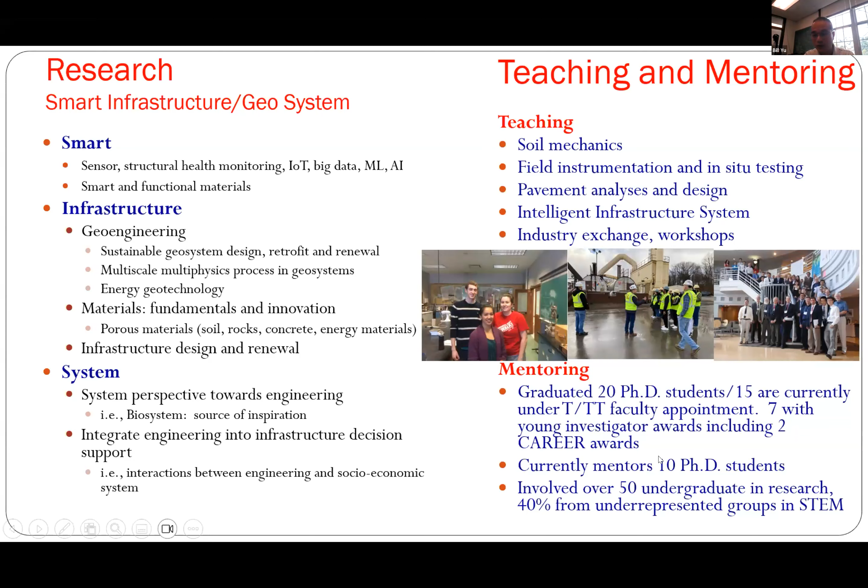Okay, sorry. So the motto I'd like to share: there was a pretty famous poem from over 1,000 years ago, saying if we want to appreciate the beauty of a mountain, we cannot stay inside it. You have to stay away from the mountain to really appreciate the grand view and the beauty of the mountain, which is very aligned with the motto at Case Western Reserve University, to think outside the box. So that's the essential notion I try to integrate into my group.

Mostly my group consists of PhD students, and sometimes we also host undergraduate students and high school students in research activities. This is a recent photo when I took my group for a retreat. After everybody shared their research, we enjoyed some happy time together. A few group members were missing, but this one captured the excitement pretty well. Every group member is passionate to explore innovation.

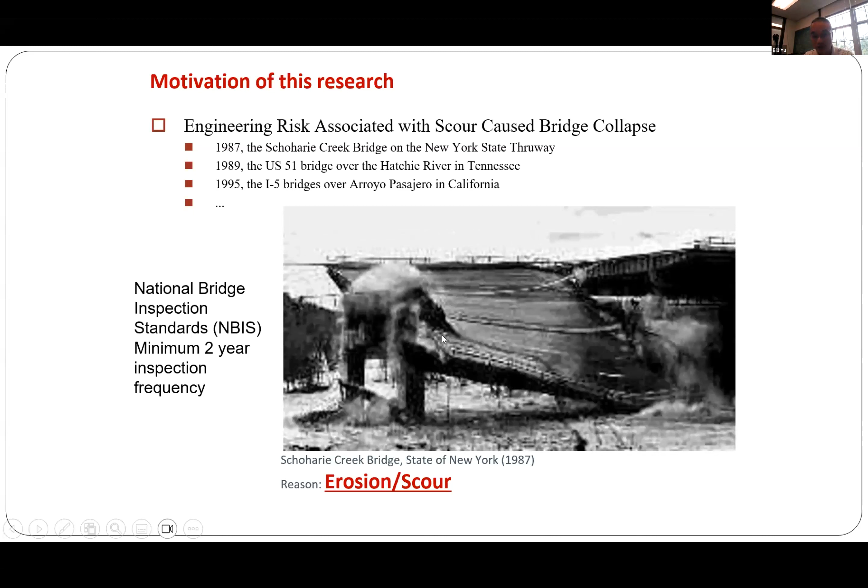So, bridge scour refers to the phenomenon when, during a flood event, the flood takes the sediment away from around the bridge foundation. Consequently, the bridge foundation, the bridge pier, loses the lateral support of the soil. Then in the extreme case, of course, bridges collapse. This has happened all over the world. In U.S. history, incidents of bridge scour are frequently documented.

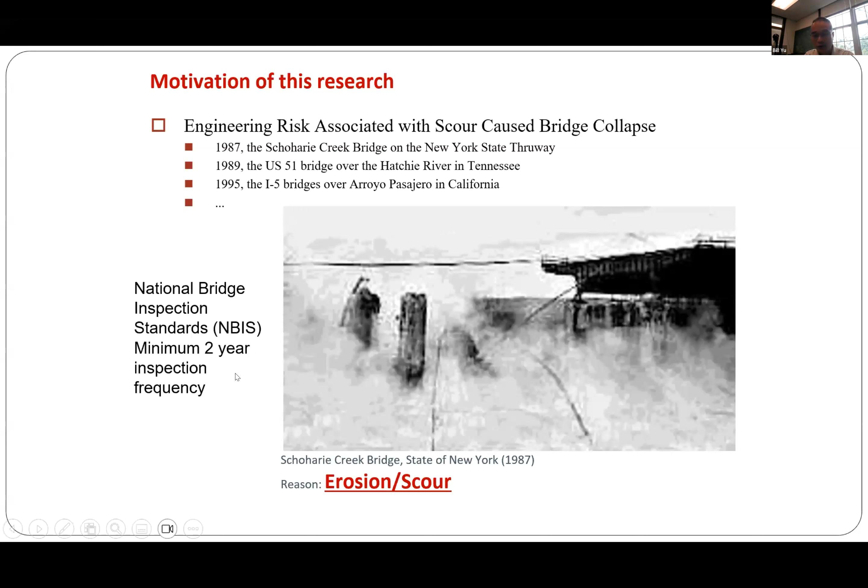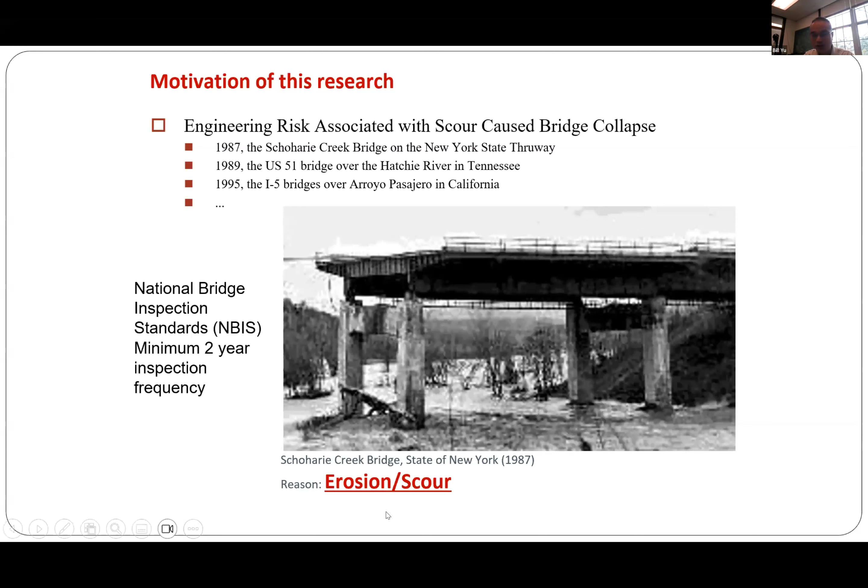Because of this kind of issue, the National Bridge Inspection Standards require bridges to be inspected every 2 years. And the fundamental issue is erosion, which involves a geotechnical process. If you look at the causes of bridge failure, the hydraulic reason, bridge scour, is responsible for almost 60% of failures. There are other factors like overload, collision by ships or boats, and earthquakes, but all these together are still a smaller contributing factor compared with bridge scour.

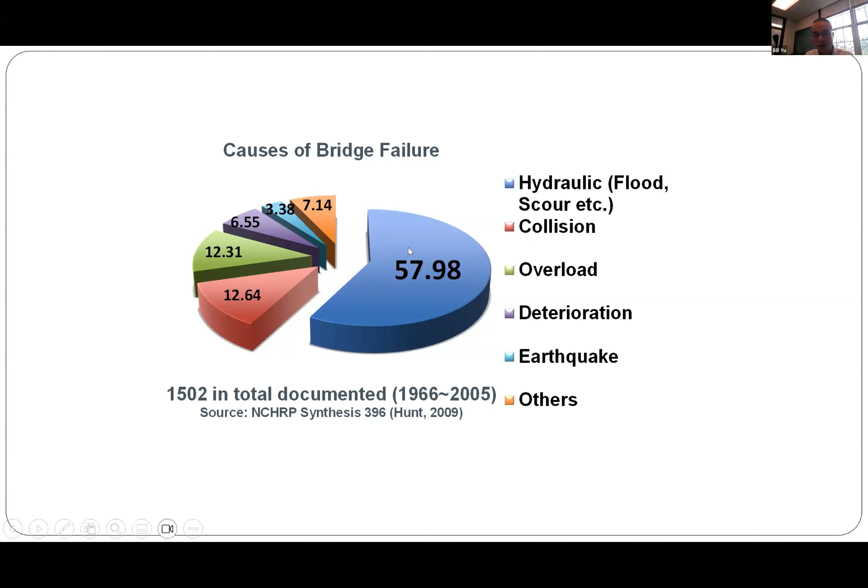So that just illustrates the importance of this issue. And also this phenomenon is very complex, because bridge scour, oh, I don't know why it's jumping. So bridge scour involves a complex interaction between fluid, soil, and structure. So it involves geotechnical engineering, hydraulic engineering, structural engineering. So essentially, it's a complex issue.

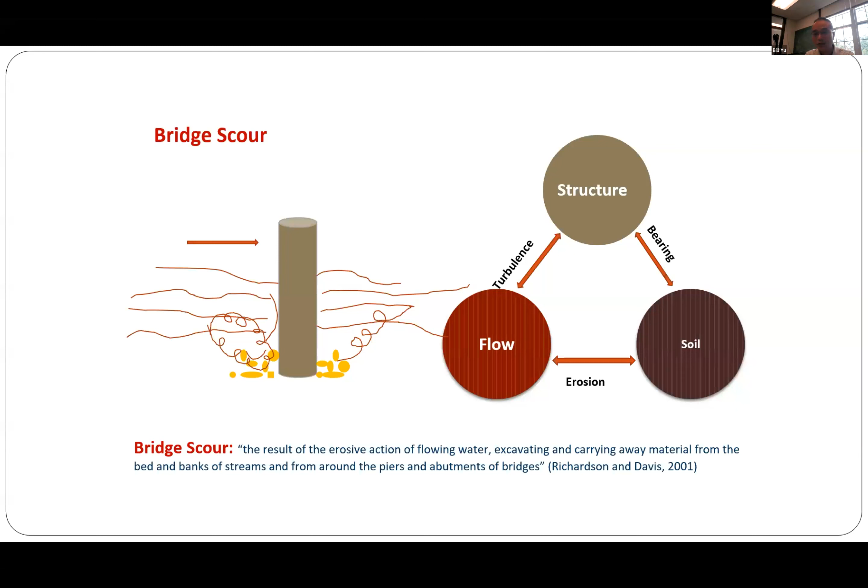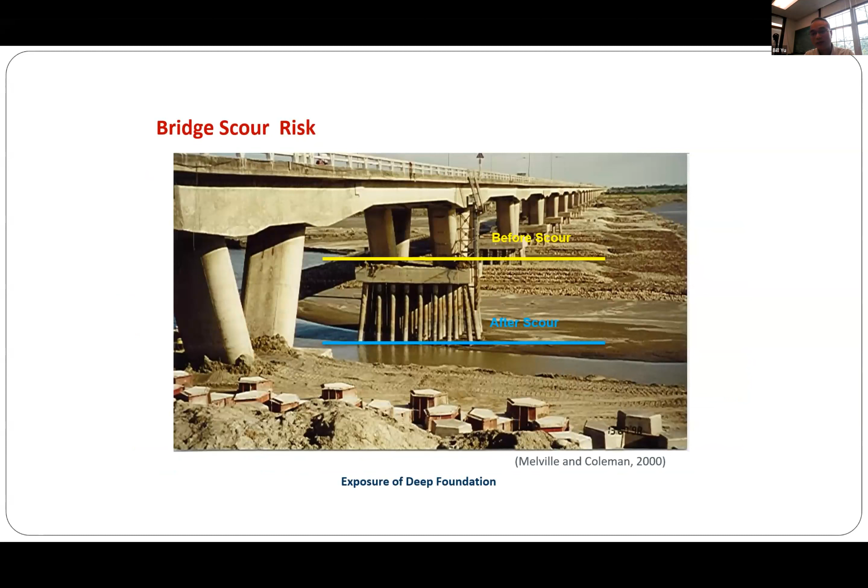And also the consequence is, it takes the sediments around the bridge foundation away and exposes the bridge foundation, makes the bridge foundation unstable, which then impairs the safety of the bridge. And from the practice side, in bridge scour design, essentially we need to estimate how deep the scour happens when a bridge is built, so that the bridge foundation is designed sufficiently deep in order to take away the impact of bridge scour.

And also, these kinds of design equations are mostly from laboratory scale experiments. So they don't necessarily describe what's really happening in field conditions. And also, another important factor in bridge scour design is to estimate how strongly the soil resists erosive force. This area, what's called a soil erosion model, has been studied for a long time in hydraulic engineering, in the water resource and environmental engineering area.

So this kind of model is typically extended in practice to describe the hydraulic erosion happening with bridge scour. And experience indicates the extension of existing models developed for other purposes, like environmental or water resource purposes, does not adequately consider the unique complex soil-structure-flow interaction during bridge scour. So the direct extension model has a limitation.

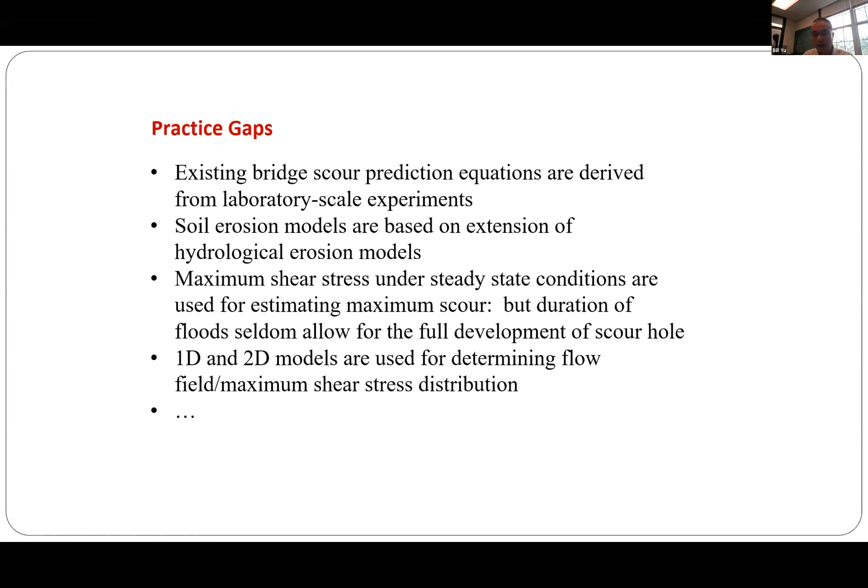So essentially, all these, from an engineering approximation perspective, provide some guideline in scour design and risk mitigation, but do not completely address the most fundamental issues, and also do not come up with the most safe and resilient design. So that's the practice gap.

During the flood event, we go to deeper scour depths, a larger amount of soil gets eroded, but during the flood retreat, sediment refills back, settles down, refills the scour hole, and then another flood comes in and erodes it again. So it's a repeating process. The current engineering practice of inspection every 2 years mostly happens after the flood event is over.

So for example, if this is a flood, the most unsafe condition, which is the deepest scour, happens during the flood. But the inspector may come back to inspect the bridge after the flood event, which may correspond to a smaller amount of erosion. So that estimation might not address the safety issue during the extreme event. So that's a limitation of the current practice.

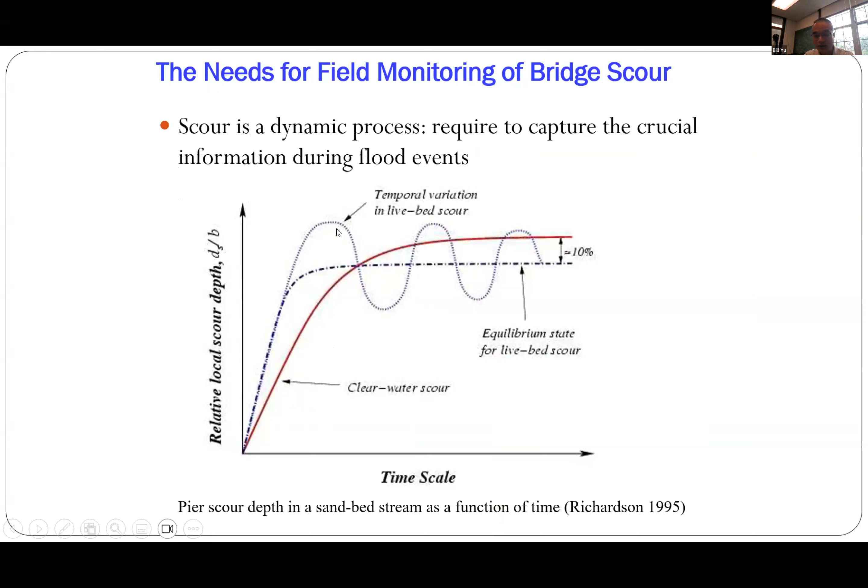So essentially, ideally we should be able to capture the erosion and also the backfilling process. But it turns out that is pretty challenging. So there are different practices to evaluate and monitor bridge scour. For example, a very common way is visual inspection. That mostly happens when the stream is relatively stable, sending a diver under the water with a camera to capture the shape of the scour hole and evaluate whether the bridge structure is safe.

There are also instruments like this one. Mounted instruments, which install a camera or something, drop it down into the river and do a survey. And this one is actually a photo shot by a research group from Japan. There's also manual measurement: the engineer uses a yardstick to dig down at the bridge abutment and find out how deep the surface of the sediment is, as a way to determine the scour.

There are also some monitoring devices developed in the history of research in this area. For example, a very common one is using ultrasonics: mount an ultrasonic sensor. The ultrasonic wave travels down the bridge through the river water and reflects back, and then from the echo, the time lapse to hear the echo sound, we find out how deep the erosion happens.

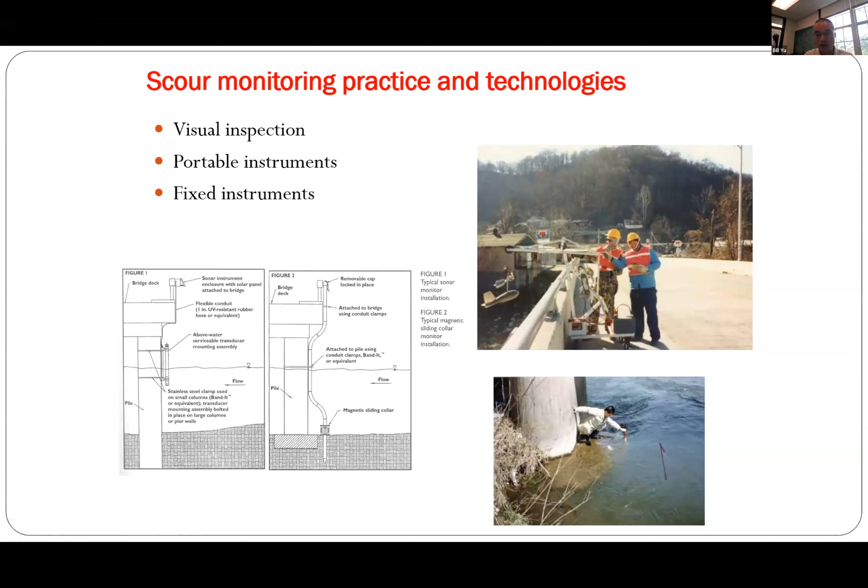So that makes it very hard to evaluate the most critical condition, when the safety of the bridge is possibly compromised. And also, for example, using a metal detector only works after the flood event, when the condition is stable, so it does not capture the most unsafe condition.

Yeah, so essentially, this study was sponsored by the Federal Highway Administration, because many bridges are subject to bridge scour and associated risk, and it's very expensive to rebuild a bridge. So the recommendation was that installing instrumentation to monitor bridge scour would be a very important safety countermeasure. Under financial limitations, this provides a way to assess the failure risk of a bridge in a flood event, provide safety warnings or decision support, and become a cost-effective scour countermeasure.

And also from existing studies, for example, some regulations by U.S. transportation agencies, like Georgia, require that if the safety condition is uncertain, the bridge needs to be shut down. One case documented in a Federal Highway publication was in 1994, a major flood in the state of Georgia, when there was no instrumentation monitoring bridge condition associated with scour.

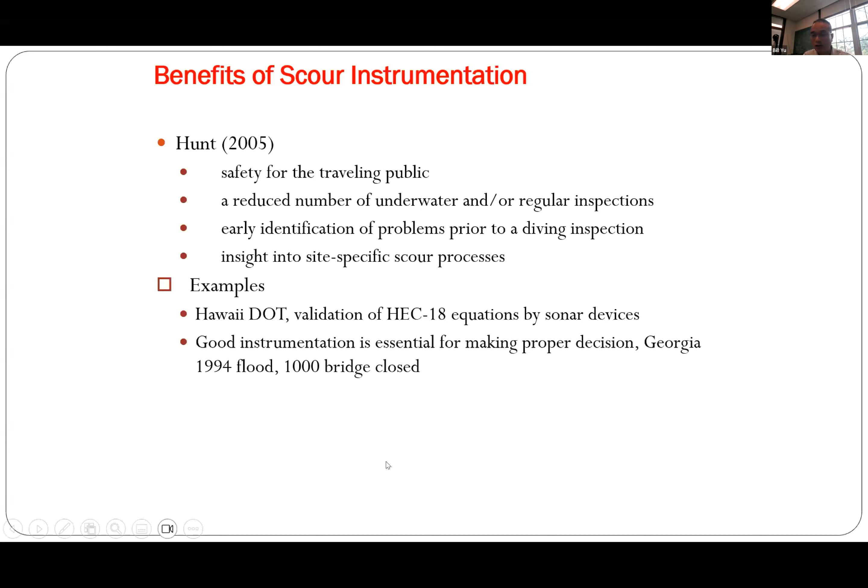So instead, because of the uncertainty and safety risk, the state DOT of Georgia decided to close 1,000 bridges for inspection before reopening them to traffic. That caused a lot of disturbance to the transportation network. So that's just to say installing bridge instrumentation to monitor scour has some benefit.

And then for the deployment of scour instrumentation, what's required, for example, the mandatory criteria: they need to be installed close to the bridge, because as one of the previous slides shows, scour holes mostly happen close to the bridge. So they must be able to be installed close to the bridge pier or bridge abutment. In terms of accuracy, we don't have to be scientifically accurate; there's a tolerance of up to 1 foot, which will not compromise much the safety assessment decision.

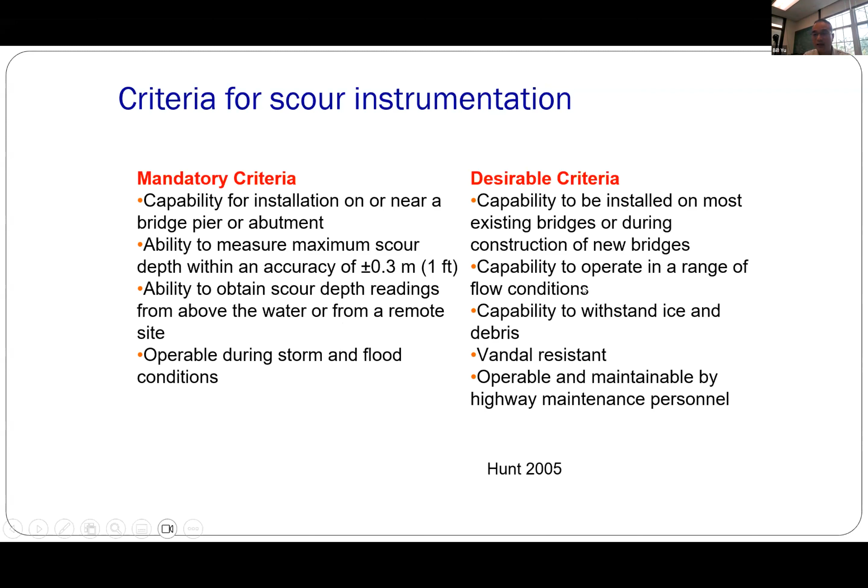Also, ideally, the sensor needs to be able to monitor the scour depth remotely, so we don't have to send people down to the bridge foundation to do the data acquisition, and also be able to survive very large storm and flood conditions. There are also desirable criteria for instrumentation, maybe not mandatory, just desirable metrics. So there are some field monitoring tools developed in the past by the Army Corps of Engineers, because they typically work with many challenging bridge river conditions.

So for example, these are the summary of instruments deployed in the field to monitor the scour hole. Again, this scour hole, as described, mostly happens adjacent to the bridge foundation. So the key is to find out how deep the scour hole evolves. There are different technologies; this one is what's called an instrumented fish.

Essentially, it's shaped like a bubble, and they are pre-buried under the sediment of the river channel at different preset depths, for example, one every 1 foot. This instrumented fish has a motion sensor and a radio transmitter. So, for example, if erosion happens, this instrumented fish will float.

When they are exposed, they float to the surface of the river, and at that moment trigger the radio transmitter to send a signal to a radio receiver that's sited on the bridge deck. So that then indicates how deep the scour hole evolves. So this provides monitoring to determine the maximum scour depth during the flood event. And this instrument is a one-time use, so you can only deal with one flood, and when another flood comes, you need to reinstall the instrument.

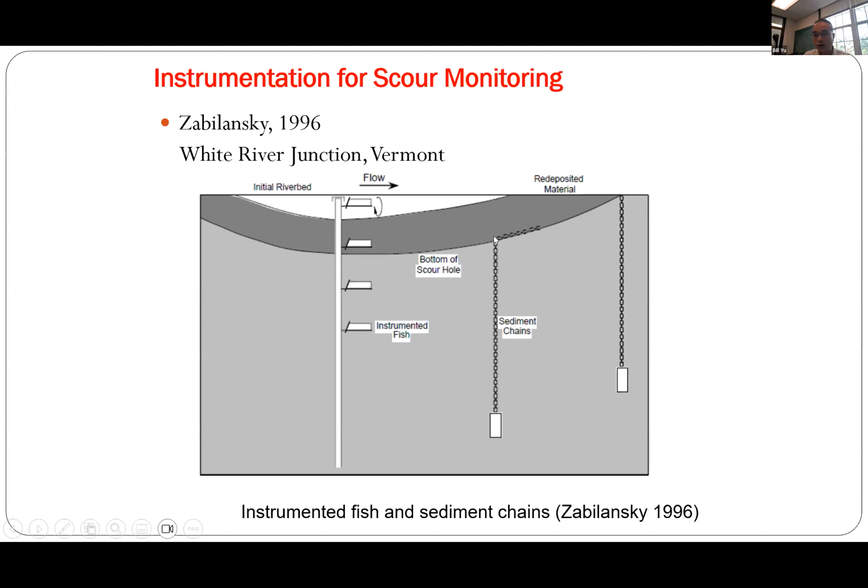And then there's another one. This is using sediment chains. So they drill a hole into the sediment and put a chain in the vertical direction at different locations along the bridge scour hole. Initially this chain will be vertical. If the sediment gets eroded, the chain will fall down. So by post-flood retrieval of the sediment chain, you can find out how deep the scour hole evolved during the flood.

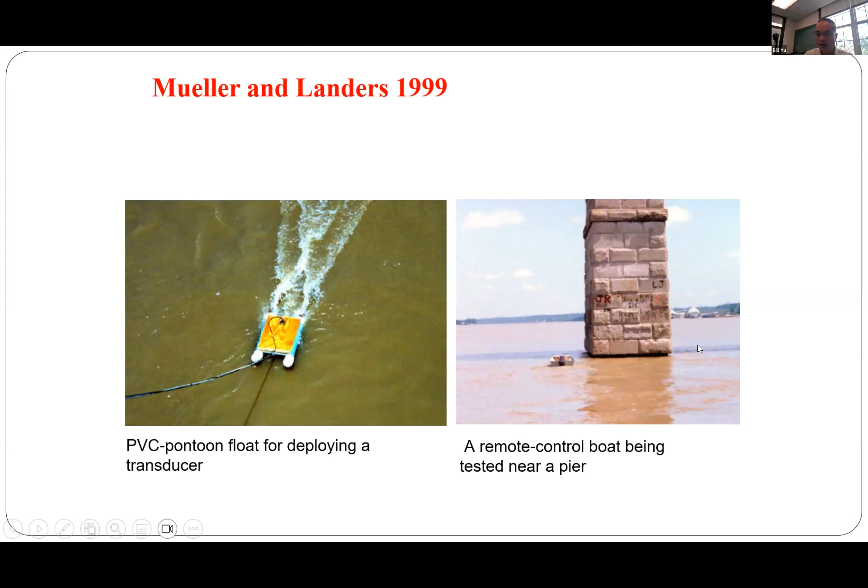So there are a lot of different studies looking into developing instruments for scour hole assessment. As mentioned, there's also acoustic-based methods and metal detector-based methods. There's also a remotely operated boat with an acoustic sensor. They can remotely control it and circle around the bridge pier to find the scour hole. These kinds of instruments typically work pretty well in steady water conditions, but during the flood, a lot of debris comes with the flood, making operation of the remote control boat challenging under that condition.

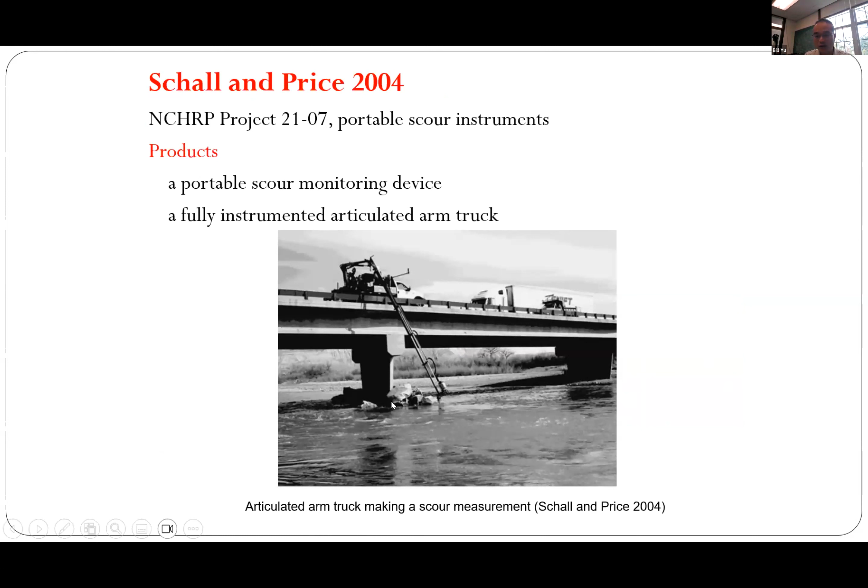So there are also tools using a tractor articulated arm truck that allows probing the scour hole depth while the inspector is located on the surface of the bridge, without having to access the bridge foundation and expose the personnel to the risk. So essentially, these are the state of practice. The sonar sensor is the most popular, then magnetic, using the metal detector with a sliding collar, second, and then the instrumented floating device third.

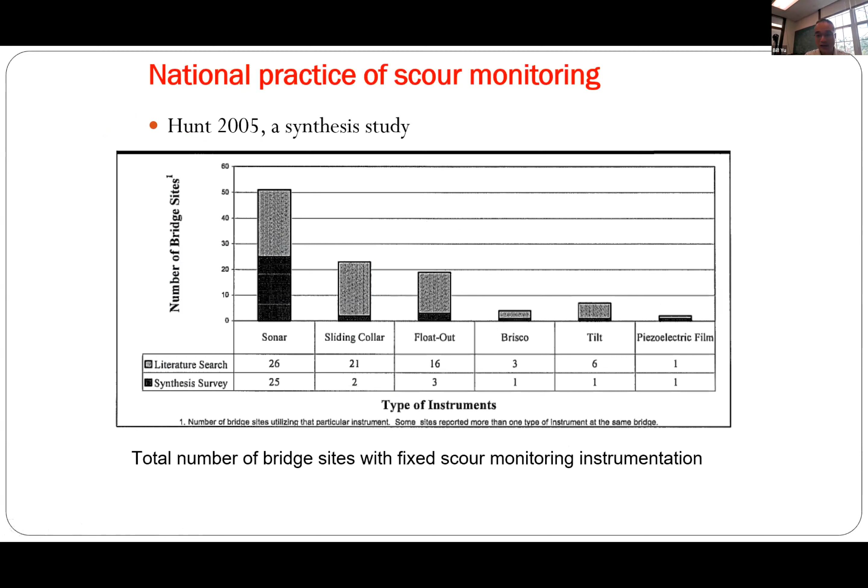So these are just the state of practice. Sorry, this automatic advance, so strange.

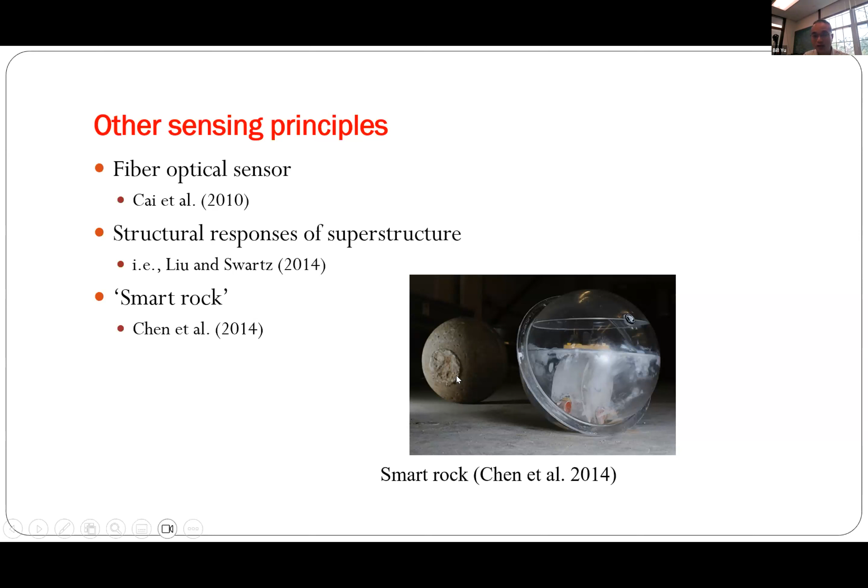So in recent years there's been some newer progress in the domain, using fiber optic sensors mostly to monitor structural stress development, because scour leads to changes in the structural response. There's also another technology called smart rock. It's a sensor with a magnet inside, encased in shielding that looks like a rock, with a round, spherical shape. During the flood, this rock always falls to the bottom of the scour hole, and then we can use a magnetometer to locate the smart rock and find out the scour hole depth. So that's the new development.

The Army Corps of Engineers and also Northwestern University developed a time domain reflectometry based scour monitoring device. This one uses a thin vertical cable with blades along the cable. When the scour happens, it exposes the cable and the blade. The blade will rotate, causing a shearing force on the cable. This involves guided radar waves sent down from the bridge superstructure. When the cable is sheared, there's a reflection. So this allows detection using electrical waves to find where the blades are exposed, or where the erosion depth evolves.

There's another one using similar time domain reflectometry, guided wave electromagnetic radar. This involves sending a signal, like the echolocation principle, in the bed. The signal travels along the waveguide, and when the waveguide sees a difference in the surrounding material, like water versus sediment, it generates a reflection. This also allows us to tell how deep the scour hole goes.

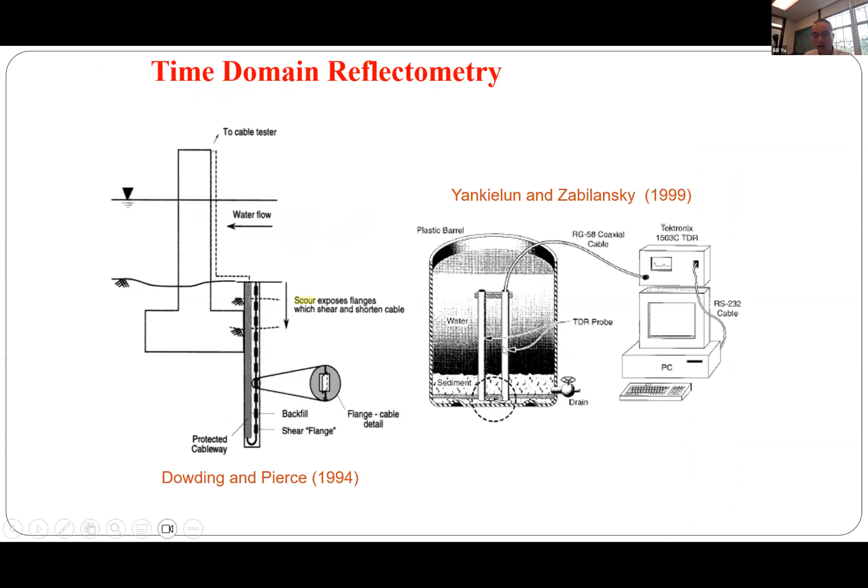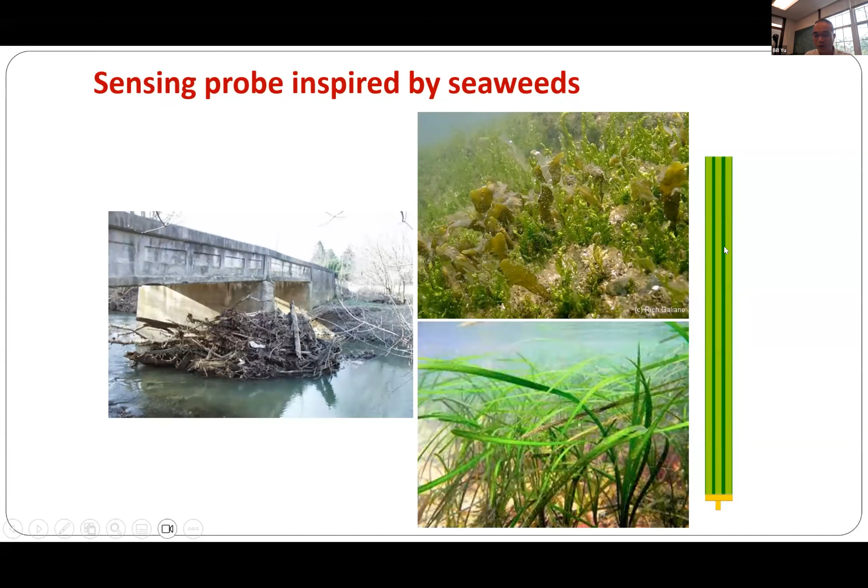So essentially, inspired by that, we developed this kind of seagrass-inspired sensing probe using guided radar. The principle for this monitoring device is to send an electric signal which travels along the flexible waveguide. When it arrives at the water-sediment interface, it will generate a reflection, and then at the end of the waveguide, it generates another reflection. So in principle, by analyzing the signal reflection, we can identify how deep the sediment-water interface is, or how the scour depth evolves.

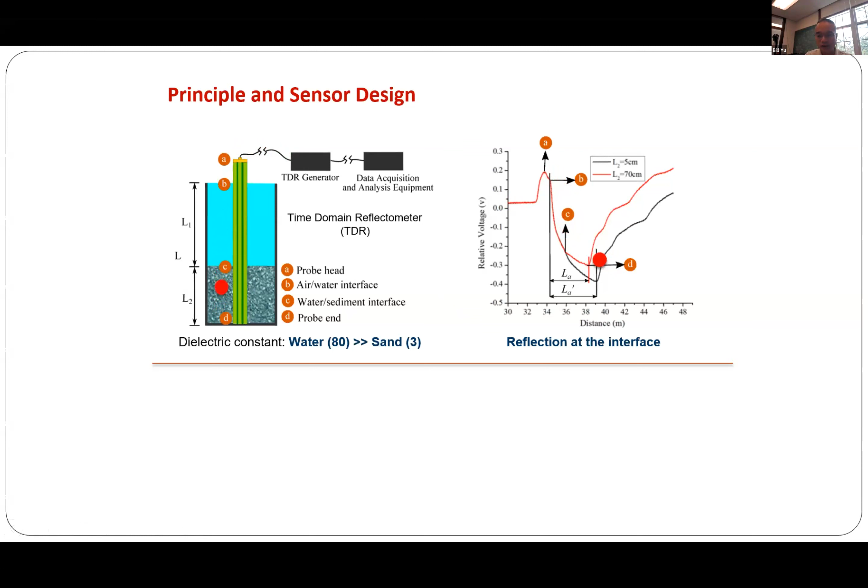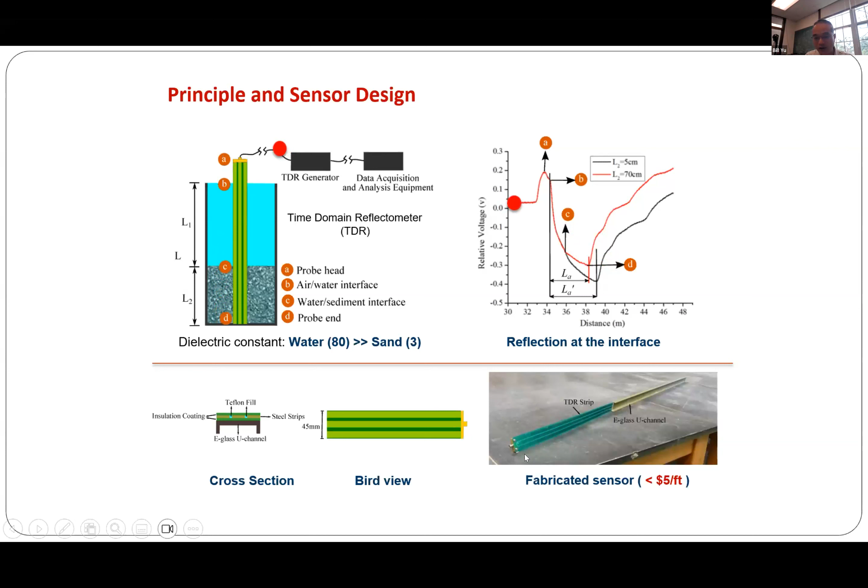So this is the actual prototype we fabricated. Using this concept, this is a flexible stripe made of inexpensive metal, three parallel metal strips with a coating, mounted on a supporting structure. So the cost is pretty inexpensive. And this illustrates the sensing capability. With this stripe as a waveguide, the bare stripe has a signal response like this solid line.

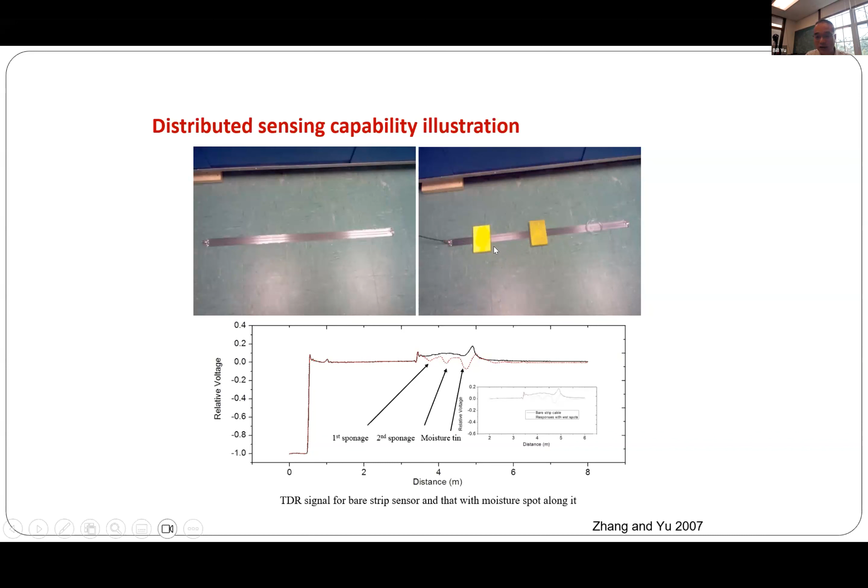And then we put artificial wet spots: a slightly drier sponge, a sponge with a lot of water, and also this moisture tin with water. When the wave travels along the waveguide, it generates a response because it sees a different material. So we can see the three dips in the signal response. This is an indication that the sensor is pretty sensitive to what happens surrounding the sensor probe, and to changes in material condition. For bridge scour, the change the sensor detects is the interface between the water and sediment, which is differentiable.

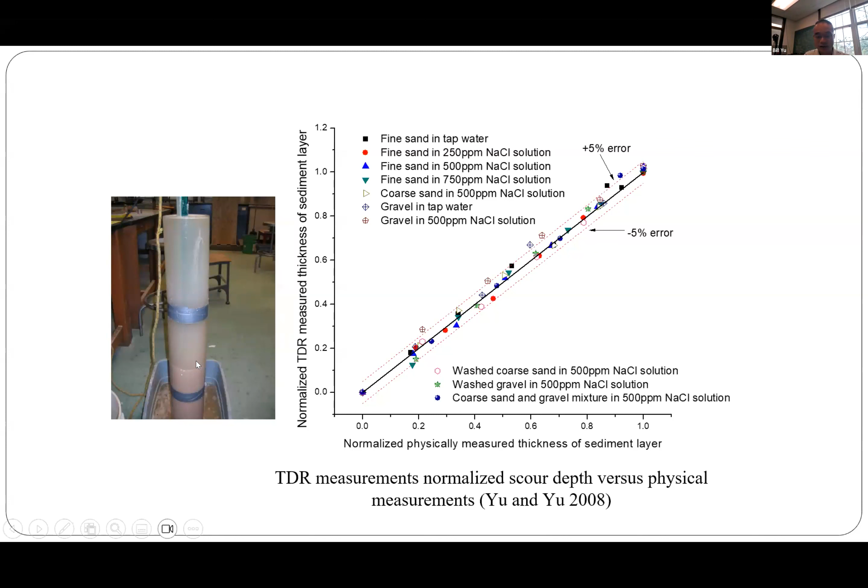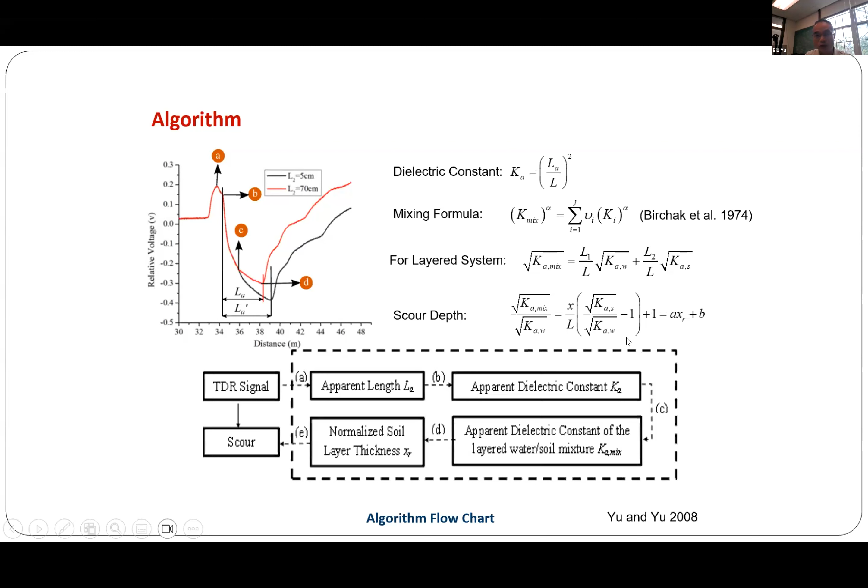Based on the laboratory study, we came up with a series of guides to analyze the signal from what's called guided radar, electromagnetic radar, time domain reflectometry (TDR). The signal response is kind of linearly related to scour depth. There's algorithm development behind this, but the end story is we came up with a simple way to interpret the signal to find scour depth with a relatively simple relationship. This is very important for field deployment, because we want the signal to be automatically analyzed rather than manually interpreted, since we can have a lot of signals from a field monitoring program.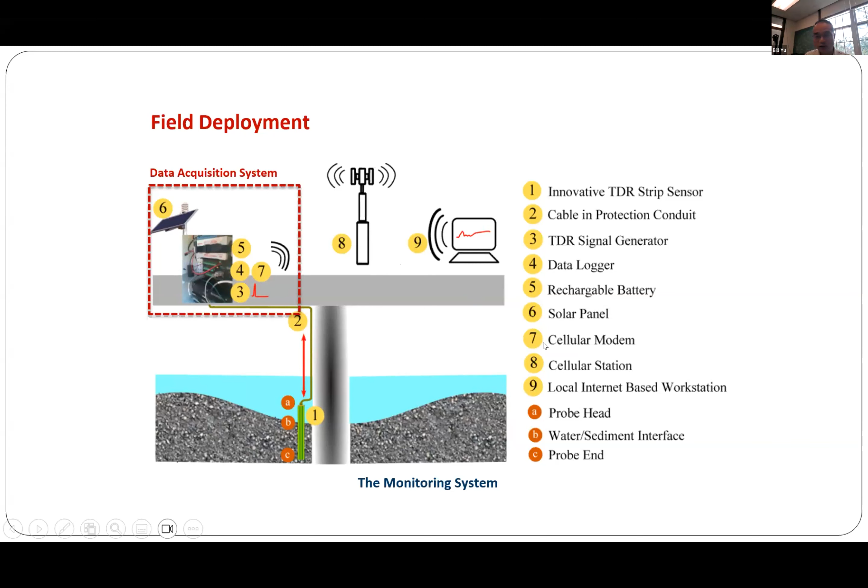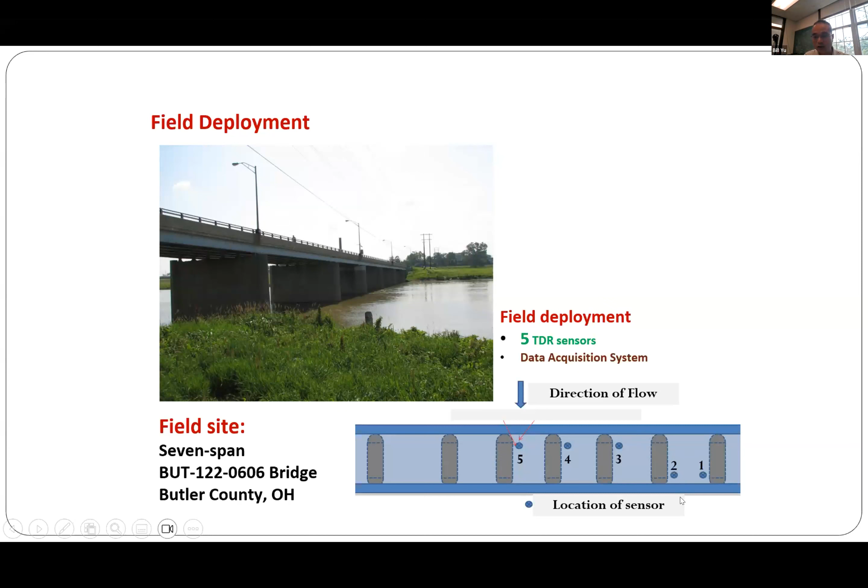We implemented that together with the Ohio Department of Transportation on one of their bridges. This bridge has seven bridge piers, and we installed five because it's a kind of symmetric condition. We tried to assess how well they would work in actual field conditions, with assistance from partners, including consulting companies.

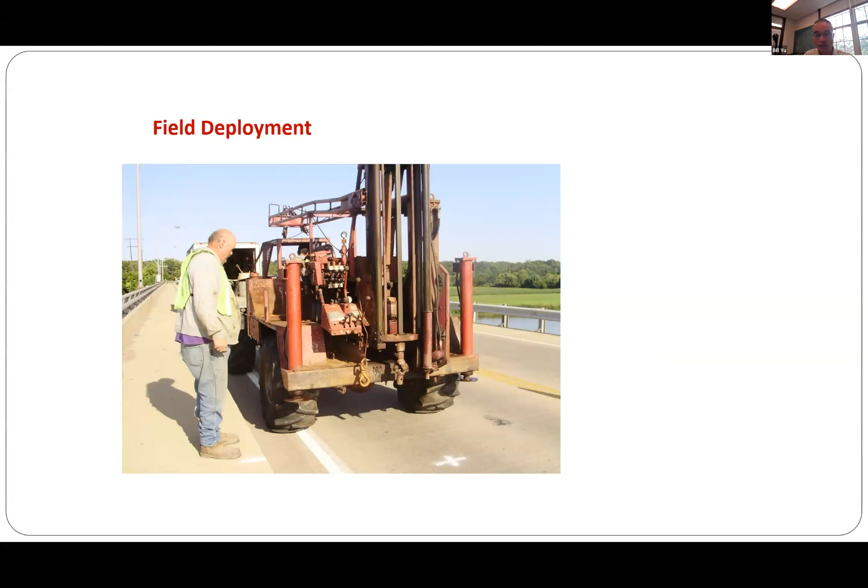What we did was bring the machine, because in geotechnical engineering surveys, if they retrofit or rebuild a bridge, they typically drill holes in the river channel to sample the soil and do geotechnical analysis to come up with a new foundation design. So we leveraged a similar procedure. Our sensor is designed to accommodate the hole drilled by this drilling machine at a regular geotech site investigation. So we drilled through the bridge deck and then put a tube down.

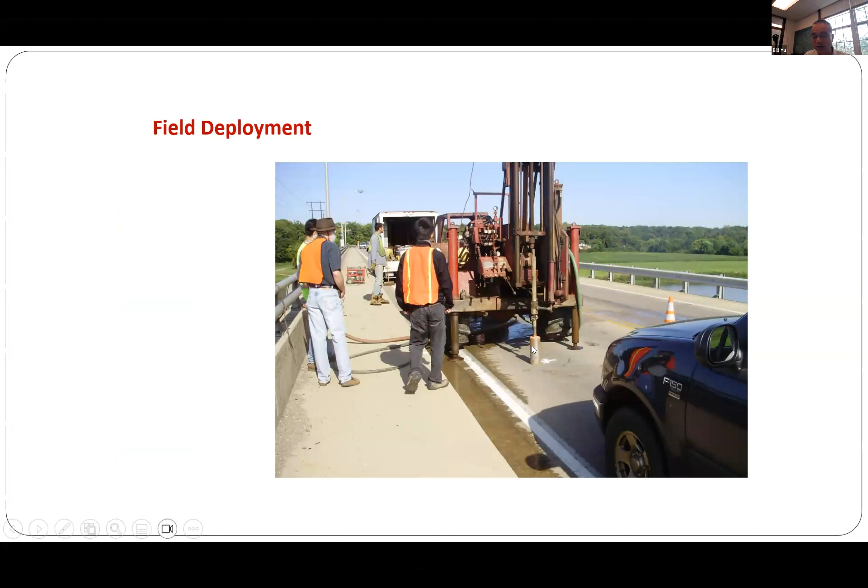That's the procedure commonly used for soil sampling in the site investigation for a bridge located across the river. Then we deploy the sensors through the tubes under the river channel. After that, we fix the bridge deck.

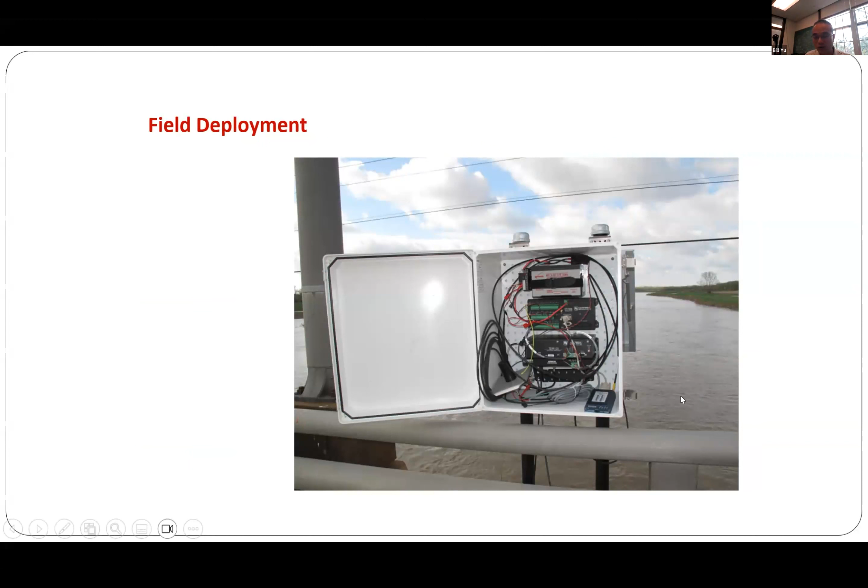Then we install the instrument on the side of the bridge. This is a monitoring box installed, which includes the battery and also a solar panel for long-term monitoring purposes, and also the controller, and a signal generator and a communication device.

To send the data to the cellular phone service, and relay that data to the office. Essentially, right after installation, we see a system change in the signal response, which indicates that after the small probes are installed in the ground, they disturb the condition of the riverbed, and there's a certain stage for the signal to become stabilized, and it caused a little bit of erosion.

Also, because the guided radar was able to get signal automatically, it allowed us to determine the scour process continuously. So essentially, we are able to capture scour development and backfilling process. We captured both processes, and also the bridge we studied has a river monitoring station.

So that has a river flow measurement. Essentially, what we found is the scour monitoring results correspond very well with the river flow condition. Every time there's a flood, like a peak increase in the stream flow, we see more erosion, and afterward there's a backfilling process. So that's the kind of validation.

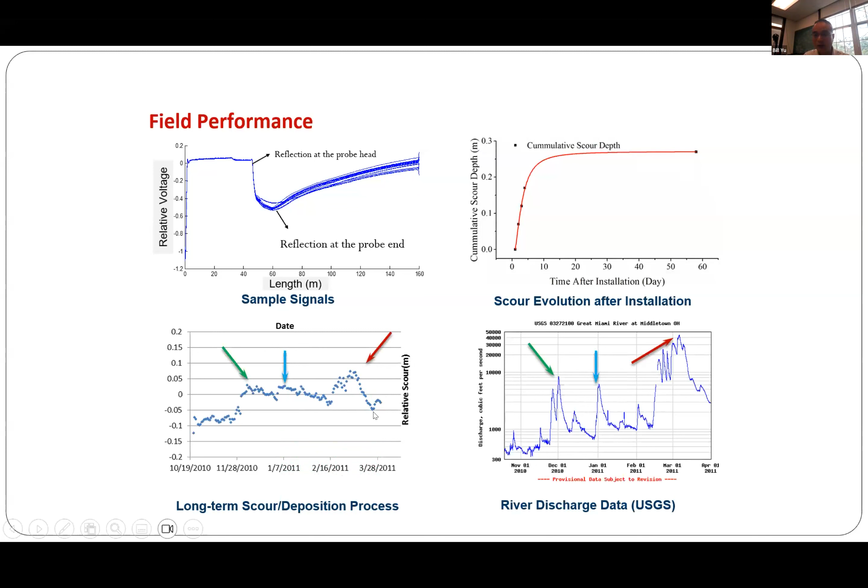The technology was able to capture both the erosion and the backfilling process, identifying the scour as a dynamic rippling effect.

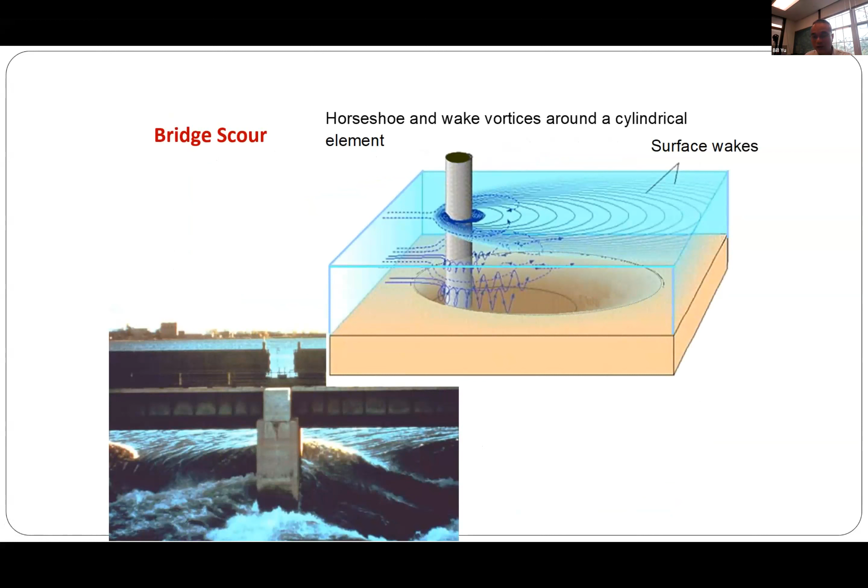It turns out there's no good way to characterize the energy of turbulence flow. In mechanical engineering, they use hot wire technology. You essentially put an electrically resistant wire in the boundary layer and blow wind, for example, to measure the turbulence flow, characterizing how quickly thermal energy is lost by the wire to be dragged away by the air. That's what indicates the turbulence energy.

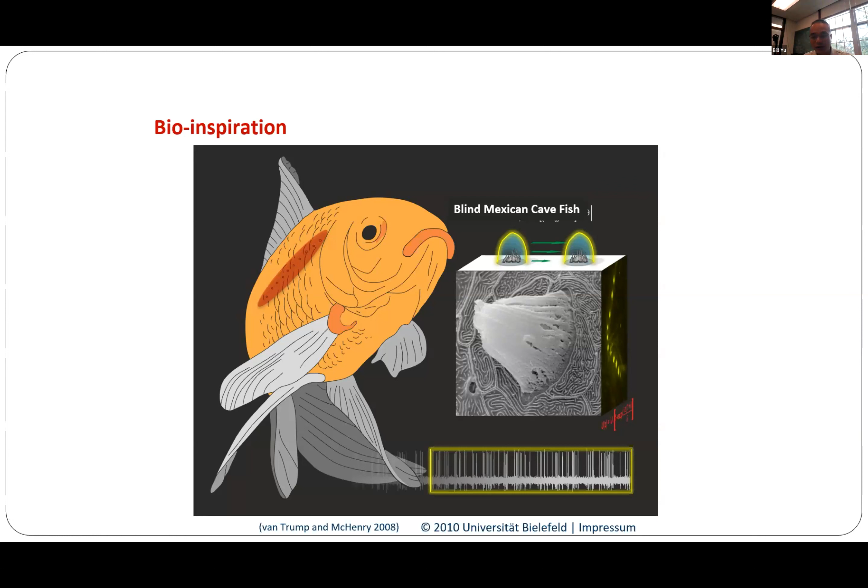So for this one, the story is about characterizing turbulence. There's no good way to characterize the turbulence using a sensor. For this part, we got inspired by reading literature from biology.

There's a very famous fish called the Mexican blind cave fish. As the name implies, this fish does not have any eyesight, so it's blind, but it still survives pretty well. So we were curious how it can identify conditions when swimming in the river.

It turns out they have a very unique design with a turbulence sensor on their lateral line. Essentially, what this sensor does is generate, when there's a disturbance to what's called the hair cell on the lateral line, an electric conductance, generating an electric neuron signal that allows the fish to detect flow.

So conceivably, if a flow comes in and disturbs the hair cell sensors along the lateral line, they generate a neuron signal, and there's a time delay in the neuron signal because the flow takes a different time to arrive at different hair cell elements. By determining the travel time difference of when the neural signal is produced, and with calibration from the neural network where they already know the distance, they can identify a turbulence flow coming towards the fish.

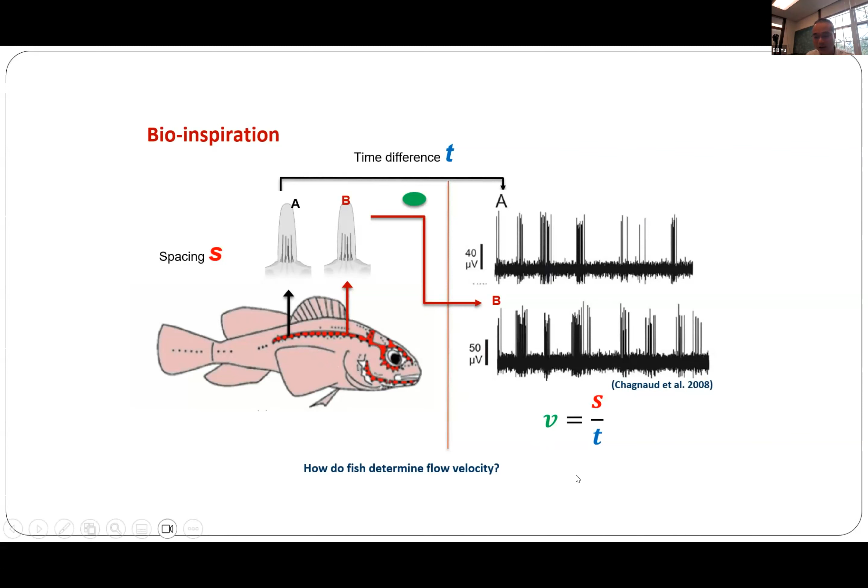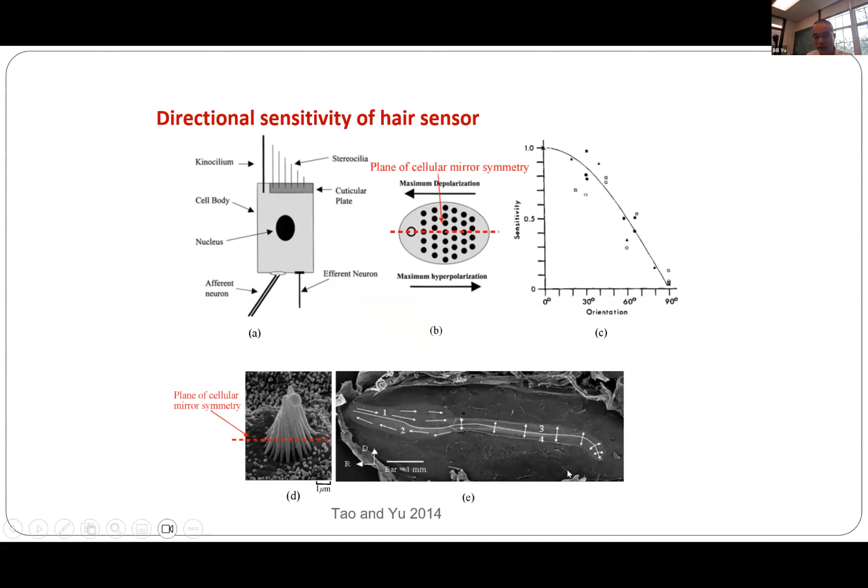So without even being able to see something, for example, if there's a predator coming for the fish, they will try to escape because they were able to detect how fast the turbulence flow is coming. Inspired by this, we actually looked to replicate this bio-inspiration to develop a sensor that's able to detect how fast turbulence flow is moving.

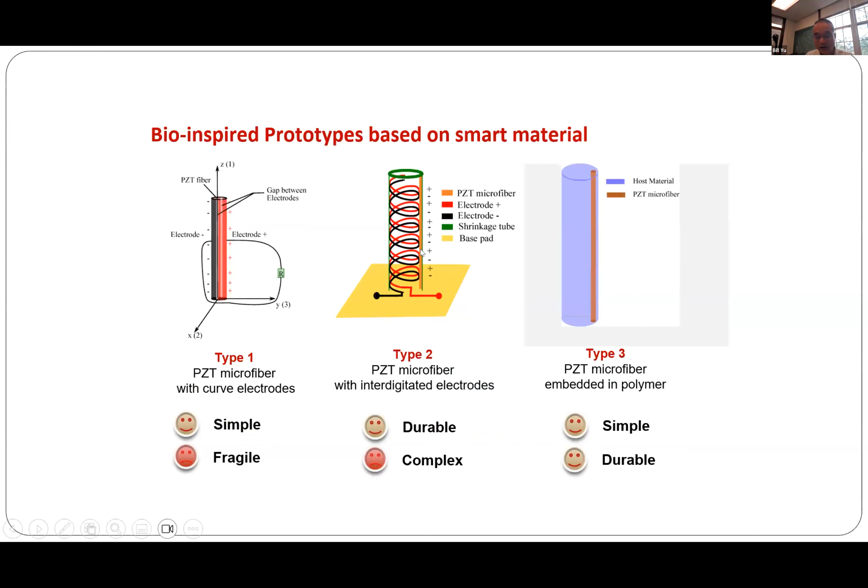So essentially, we came up with a design that emulates the bio hair cell sensor. This is a different generation we produced in the lab. The goal is for the actual sensor to be pretty small, in the micron range in length.

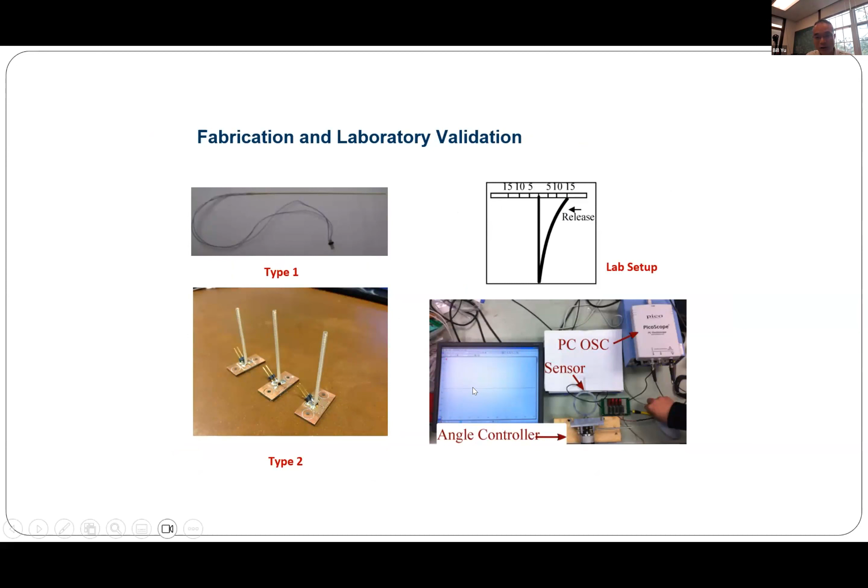We use a larger structure to capture the disturbance. So essentially, to evaluate this sensor, the sensor is under the disturbance of the structure, they generate a signal response that's allowed to detect the disturbance. So essentially, this is a concept.

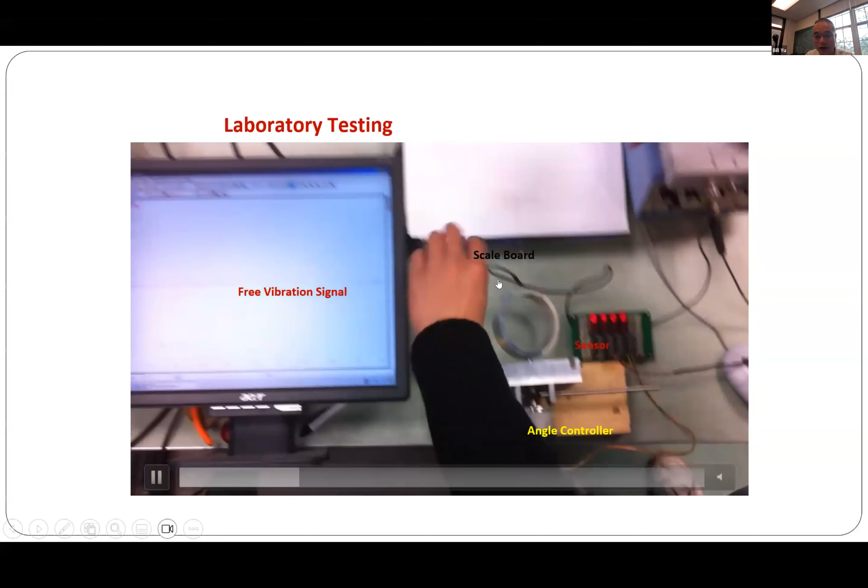It's from the setup we did. So we mounted the artificial hair cell sensor on an angle controller, and then we disturb it, like a bend, to deflect the hair cell sensor and see the signal response. We bend this one to a fixed distance and you can see the signal response from the sensor.

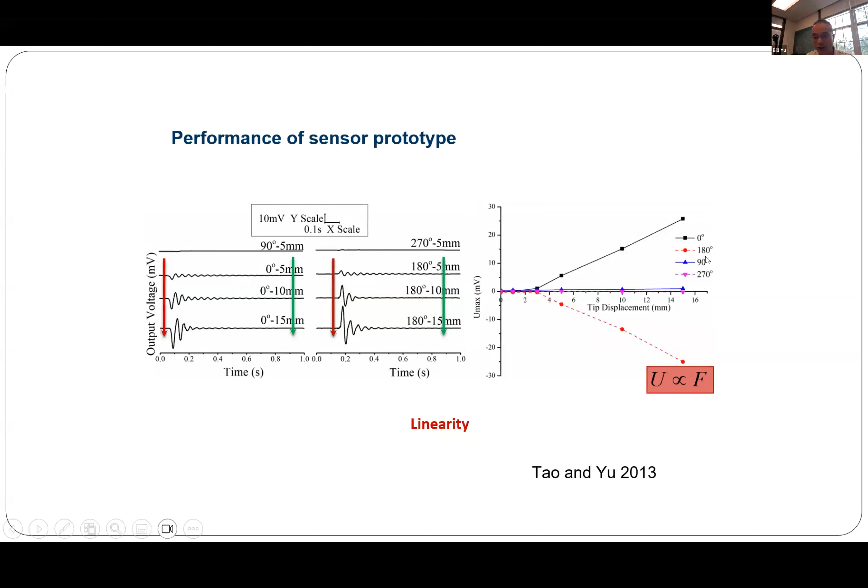Another very unique feature for the biology sensor is they have directional sensitivity, which means at a different direction they have a different magnitude response. So to summarize the result, we were able to find a design of sensor, an artificial hair cell sensor, that has a signal response very similar to what's observed in the biology system. They have different sensitivity in different directions, like 0 degree, 90 degree, 180, 270, they have different responses. This essentially allows us to reproduce the biology sensor and come up with a sensor that's able to directly characterize the magnitude of turbulence energy.

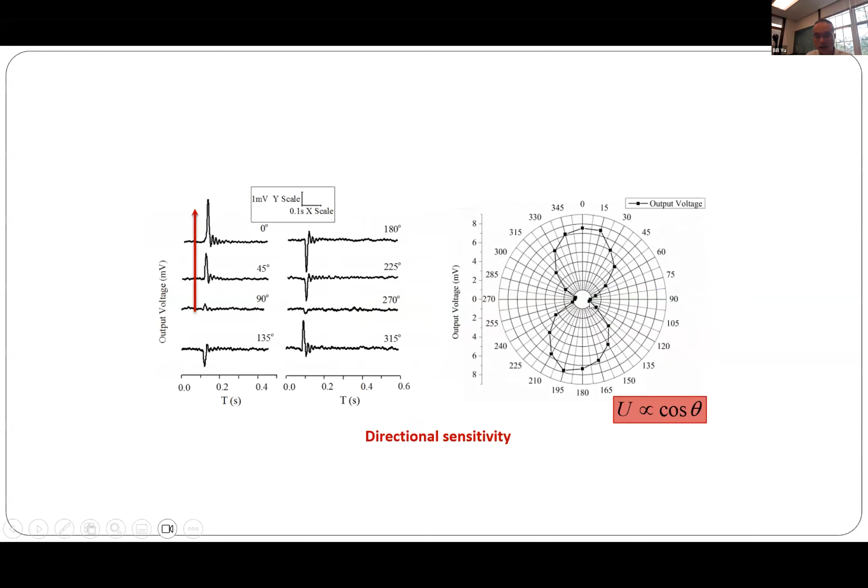So the scour process is also pretty complex. This is the workflow for that process, which requires determining the flow field, determining the shear stress, and also considering the turbulence condition to determine, in the end, the scour depth when the shear stress and the resistance are balanced out.

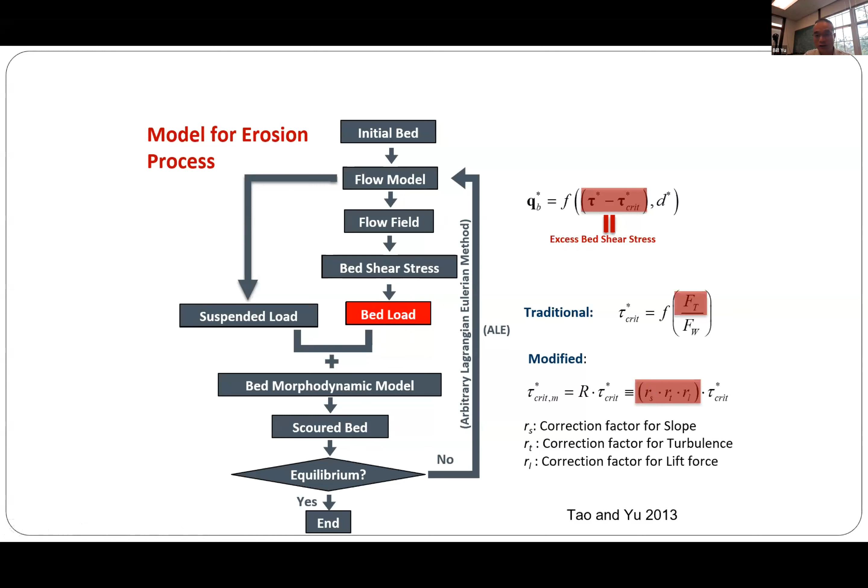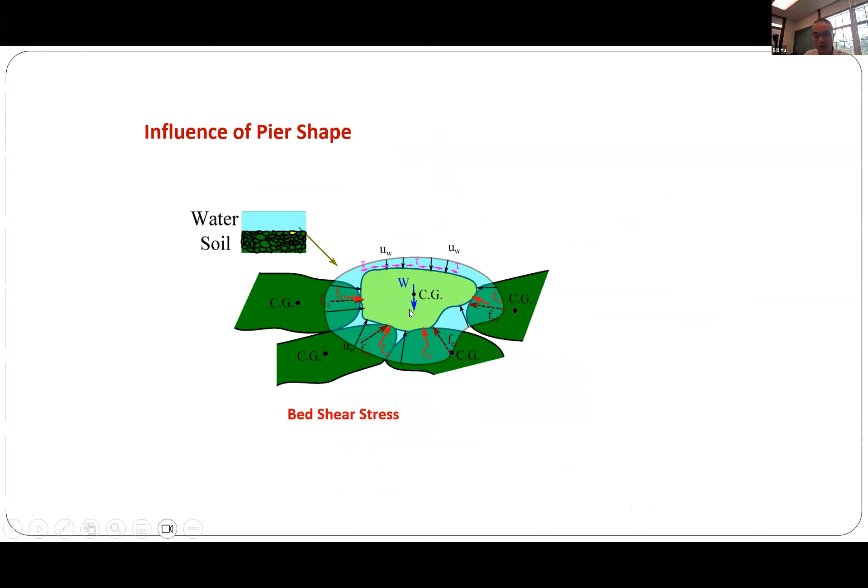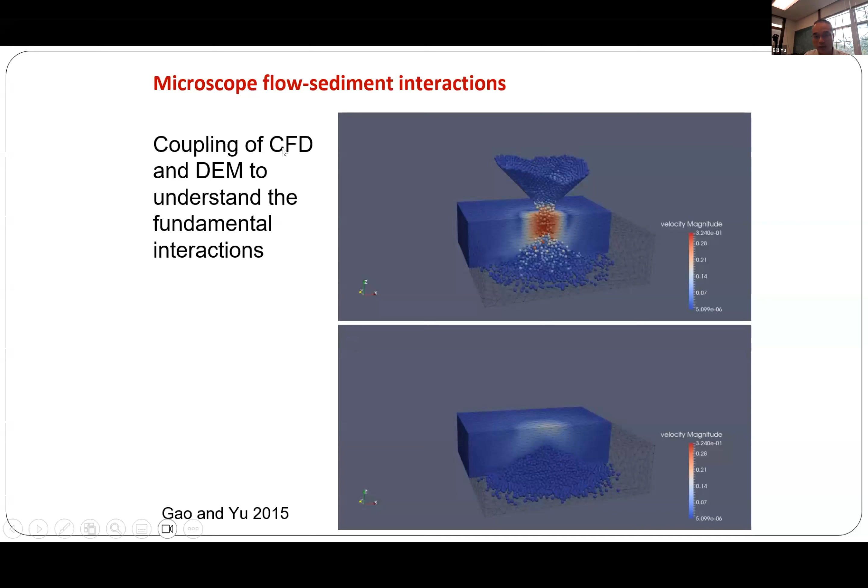So essentially, to implement this kind of multi-scale simulation, we need to understand and categorize what fundamental resistance the soil particle has to detachment by the erosion force of the stream, which turns out to be pretty challenging. For that part, we leverage a discrete element model combined with computational fluid dynamics. This is an example: CFD-DEM, computational fluid dynamics and discrete element model, come together to simulate the flow condition and also simulate how the particles interact with the flow.

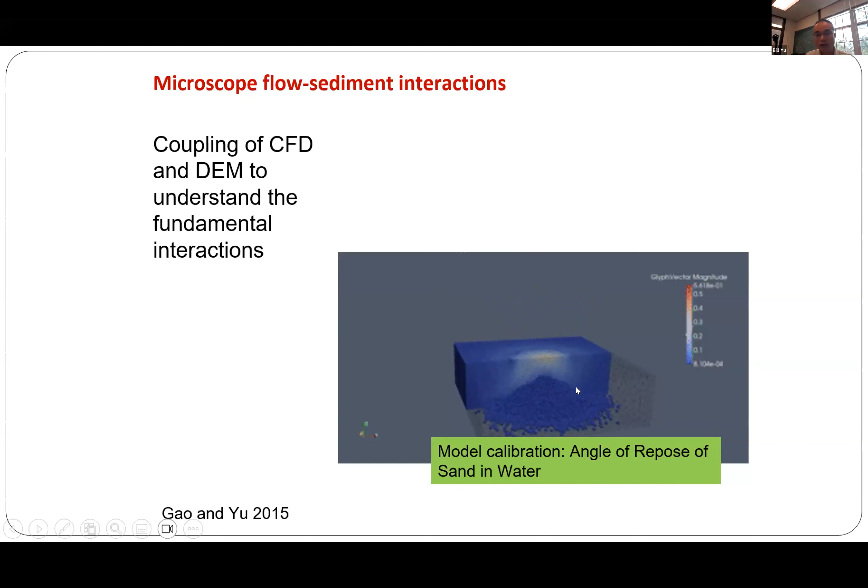So to ensure the results are reliable, first we need to validate the performance. We use this as one example: a pile of particles settles down and deposits into stationary water. What's the angle, the repose angle, that forms? We physically measure that and use CFD-DEM to simulate that condition, then compare the simulated angle with the directly measured angle as a first step to validate the model performance.

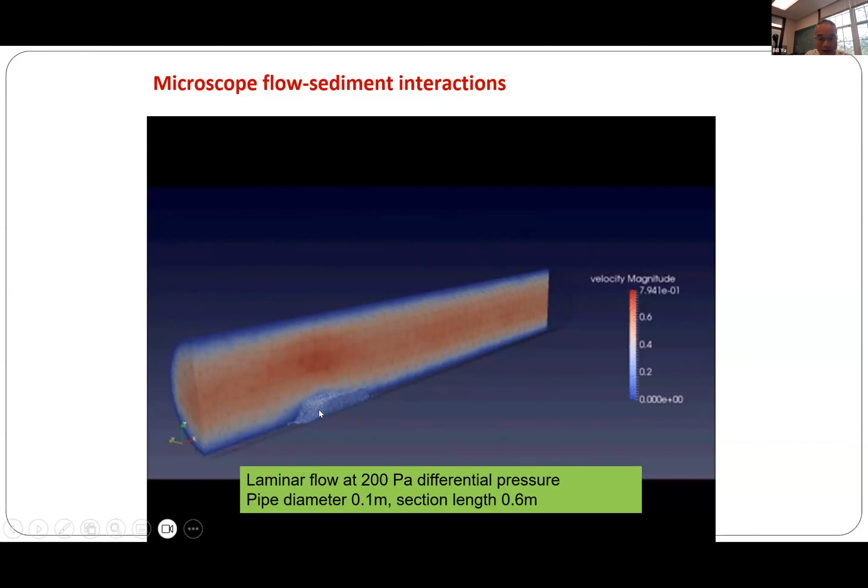And with that, essentially we can simulate the flow conditions, like this erosion process. If there's a pile of sediment, for example in this case inside a pipe, if the flow comes in, how does the erosion process look like. So this is essentially the strength of CFD-DEM: it allows us to simulate the particle erosion process directly, from a fundamental microscopic perspective.

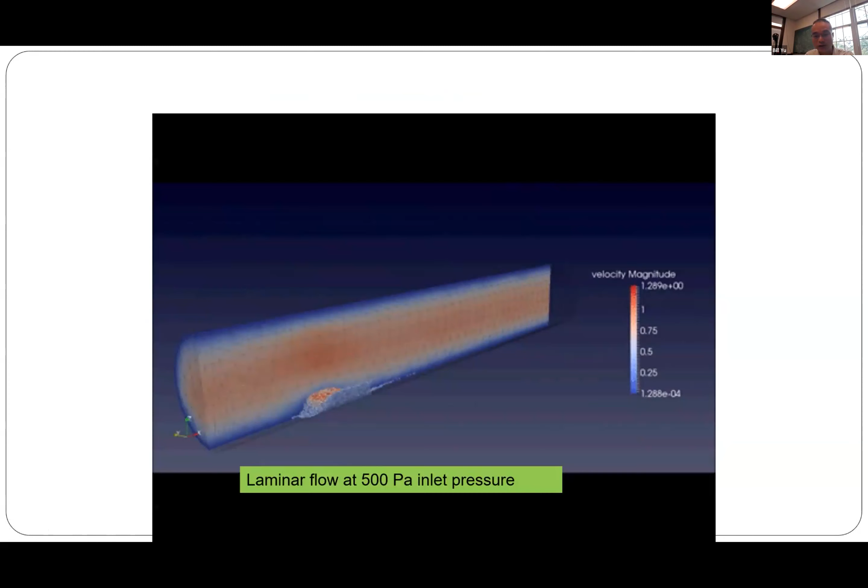And also, if we consider the turbulence, the two cases shown here: this one only has laminar flow. If we consider the turbulence energy, essentially the erosion happens much faster, which also validates why, during a flood, the scour hole can develop pretty deep, because the turbulence energy makes a big contribution to the erosion.

Also, Professor Jean-Louis Briaud from Texas A&M University has a famous erosion function apparatus that's able to categorize the erosion resistance for sediment for different types of soil. We use a virtual simulation experiment, generating particles of different shapes, then emulating the experimental condition to study the erosion rate at different flow conditions and different particle conditions. This allows us to directly determine the soil erosion resistance curve.

So for many soils, if it's a round-shaped particle like this one, any flow will make the particle start to be eroded. For particles that have angularity, there's what's called a cutoff water flow velocity - under this velocity, there's no erosion.

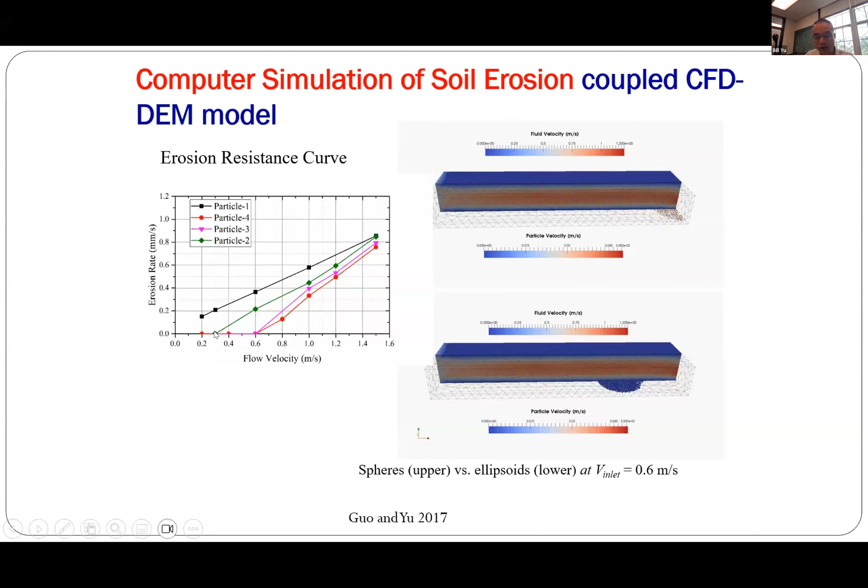Erosion won't happen if the flow is below the cutoff flow velocity, and simulation allows us to directly validate this.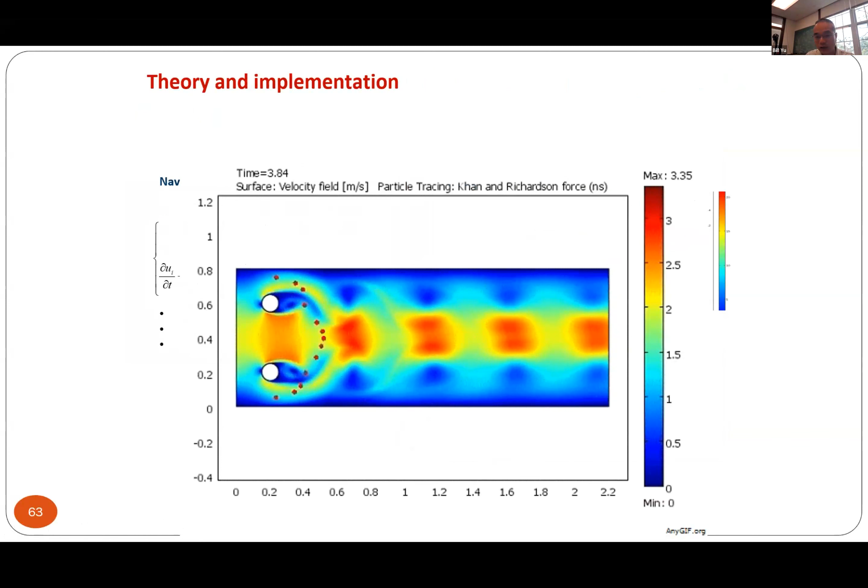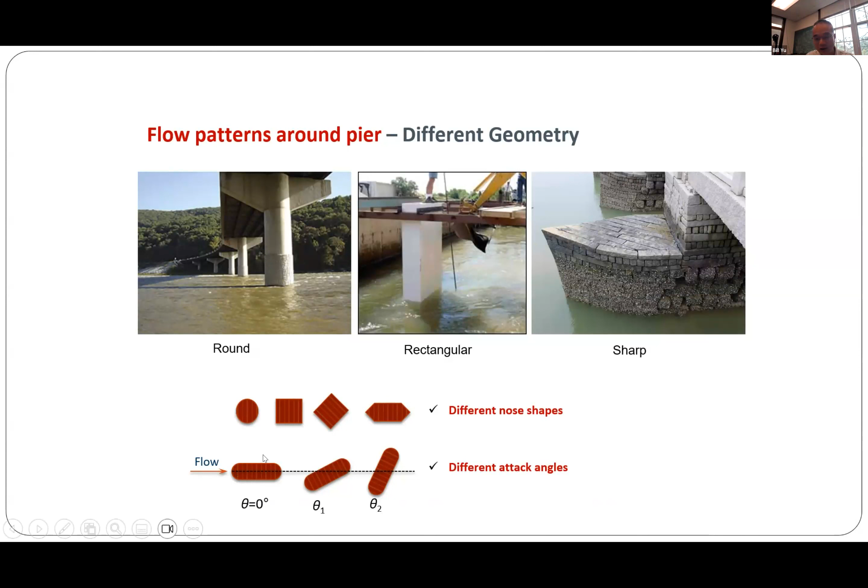With this in mind, we characterize the erosion-resistant behavior of particles and also study the overall river flow condition. Then we can combine them as a multi-scale case to guide the design of bridge foundations. For example, a round-shaped bridge pier versus one with a different shape, when there's meandering of the stream, during a flood water may come at different attack angles than what they were initially designed for, and we study how this affects erosion.

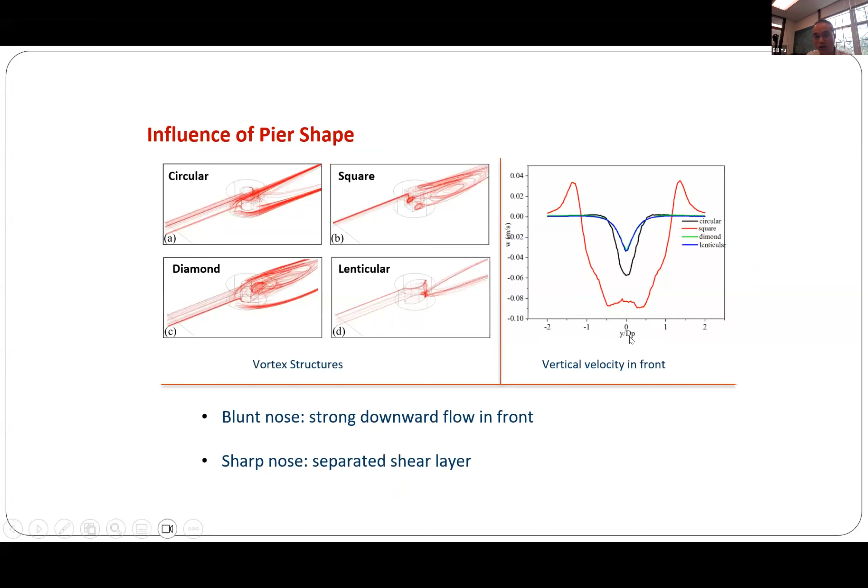This kind of simulation allows us to determine the flow field behind the bridge pier, and combining the flow field with soil erosion provides a more realistic picture of what the scour hole shape will look like. The simulation determines the shear stress, considering turbulence at the surface of the river channel, which combined with soil erosion resistance allows us to determine the realistic scour hole shape.

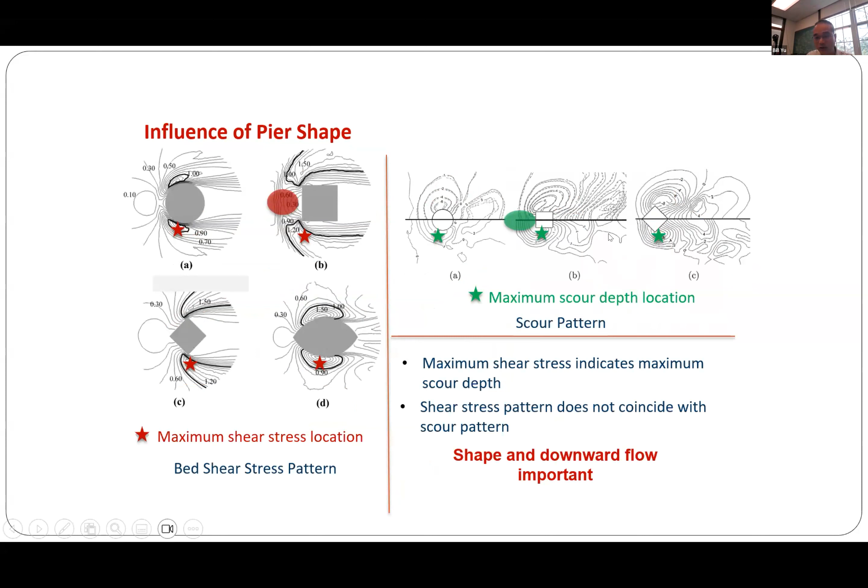From that, you can come up with recommendations. For example, a bridge pier may be designed for a 0-degree attack angle, where under normal conditions water flow comes parallel to the direction of the bridge pier, but during a flood it may come from another direction. So from this study, we were able to develop improved recommendations on how to design bridge piers to account for the stream coming from a different direction during a flood compared with normal conditions.

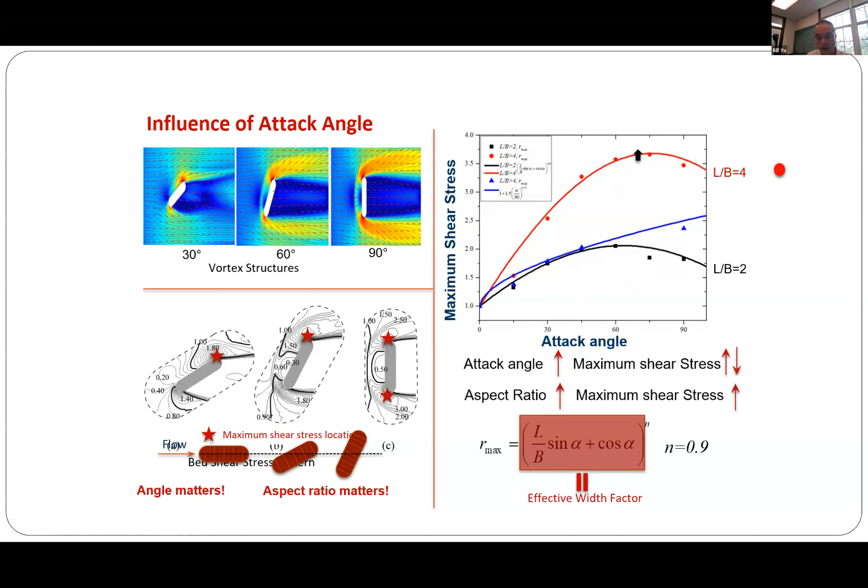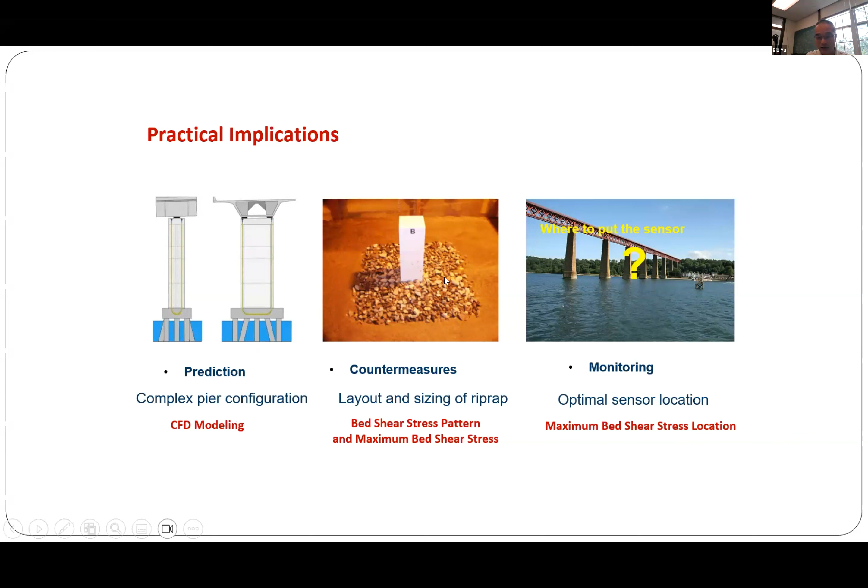Another engineering implication is that this predictive capability allows us to deploy the right countermeasures for risk mitigation. Based on the shape of the scour hole, a very common countermeasure is riprap—large boulders dumped around the bridge foundation to mitigate soil erosion. Then there's the question of how extensive this material needs to be, what size is needed, and what area needs to be protected. All of this can benefit from a better understanding of erosion conditions.

So, a brief summary: bridge scour remains one of the most challenging issues affecting the resilience of bridges and the transportation network. Structural health monitoring is an important approach for risk management, and it can help improve decision support to ensure the safety of the bridge in a cost-effective way.

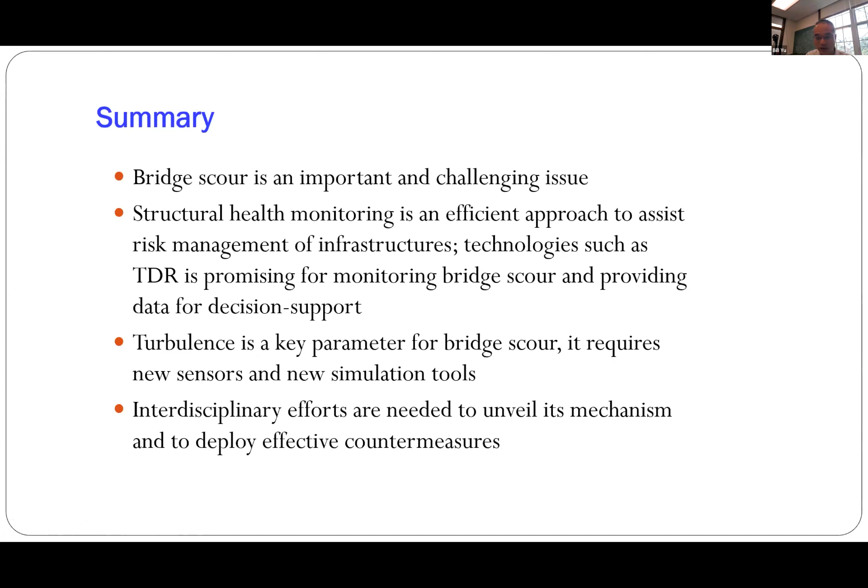From a fundamental understanding standpoint, turbulence is an important factor for bridge scour. New sensors and new simulation tools require further research, but can potentially provide a good way to address these challenges. Studying this topic also requires bringing together interdisciplinary strategies to come up with better solutions that improve resilience and safety.

Finally, let me give a brief introduction to our geotechnical engineering program at Case Western. I don't know if anybody's familiar with pile driving—it's a very popular method, the Case method.

The Case method bears the name of Case Western, our home institution. The pile driving technology was invented by three pioneers at Case Western: George Goble, a professor, and two of his students—PhD student Frank Rausche and master's degree student Garland Likins. The three of them were co-inventors of the technology, and they subsequently founded Pile Dynamics, a world-renowned company for construction quality control in deep foundations.

Our Case professors have also been pioneers in understanding the anisotropic behavior of soils and the fracture mechanics of soils—this by Professor Adel Saada, who retired last year after 60 years of service to the university. Then a newer generation, Professor David Zeng, who studied a lot of centrifuge testing, left our department to become vice provost; he was an expert in centrifuge testing. And I myself focus on a pretty broad range of topics in multi-physics, multi-scale problems.

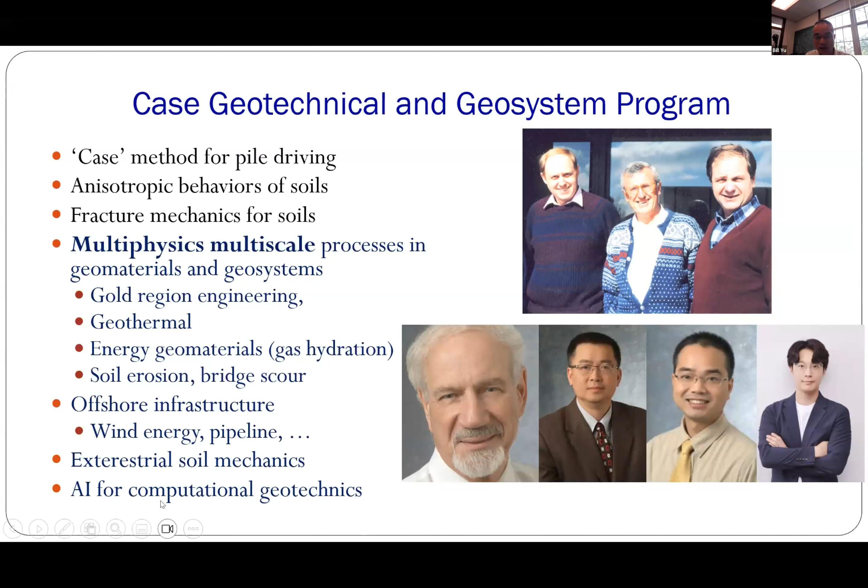Department-wise, we have built excellent research infrastructure, and we welcome potential researchers who are interested in staying at our university for a visit or other forms of collaboration.